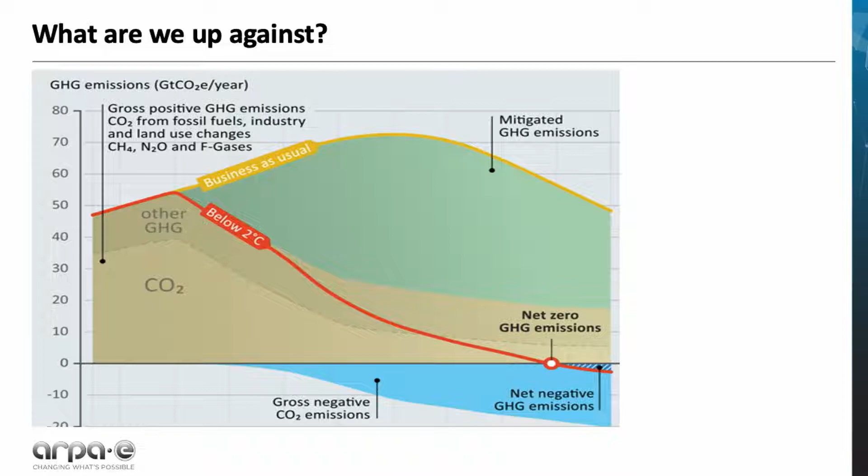I don't know if it's possible to get the slides up. Okay, on the screen. What we're going to be hearing today is 4 talks that address this carbon problem, looking at some potentially innovative routes to address not just CO2, but also other greenhouse gas emissions. The plan is to have each of us speak for 7 minutes.

Ian's going to be giving you some really novel ideas about how nuclear can fit into the carbon removal scheme. Marina is going to be talking about how buildings don't have to just be passive structures, but can take an active role. I'll talk about a different way of looking at our energy delivery systems, to see if there are some options we may not be considering around low-cost, low-carbon energy delivery. And Elizabeth will finish us off talking about how we can essentially reverse what we've been doing for the past 200 years and put the carbon back where it belongs.

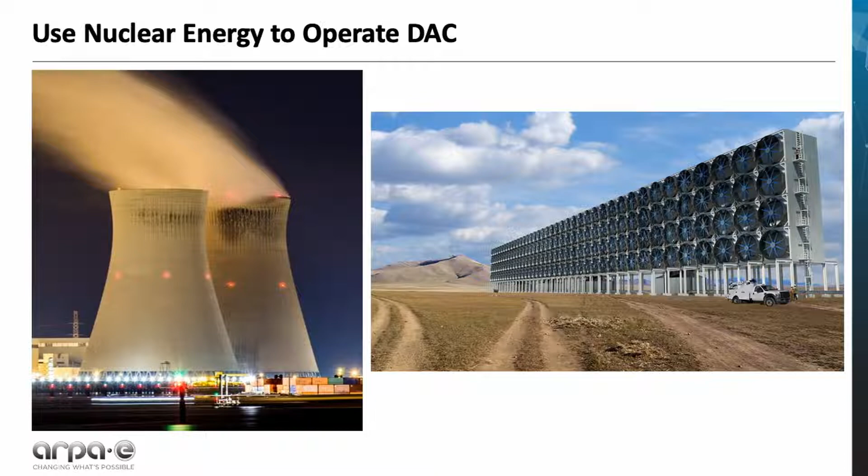At a first glance, most people would recognize that these are two very expensive processes. Nuclear energy is one of the more expensive energy generating processes, and direct air capture is one of the more expensive carbon removal technologies that is also energy intense. So people would first think, why is this innovative in the first place?

If you look at what a potential process flow diagram would look like, you would get nuclear heat from a nuclear reaction, make electricity, and then do a thermally driven direct air capture process.

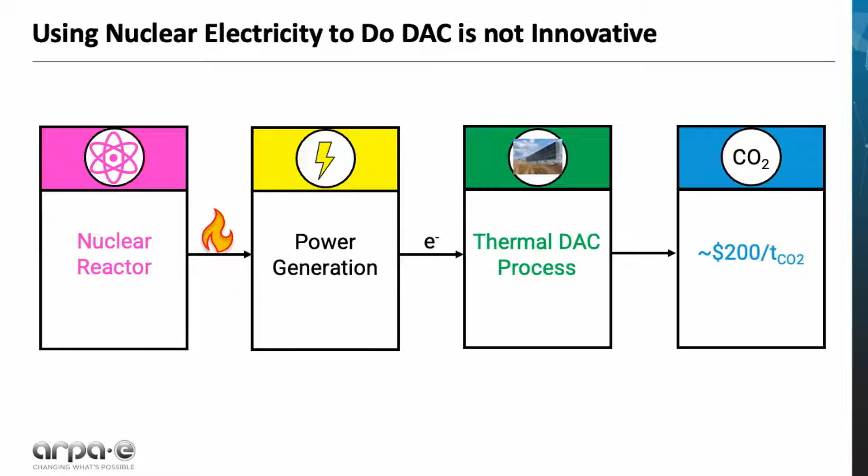Well, I don't actually think that's the innovative part of using nuclear energy to do direct air capture. What I actually think is you eliminate the inefficient step of going from heat to electricity to drive a thermal direct air capture process. Nuclear reactions produce heat — they do not produce electricity — and I think the mindset needs to be broken that nuclear is only an electricity generating source, but rather a great source of low cost, low carbon energy.

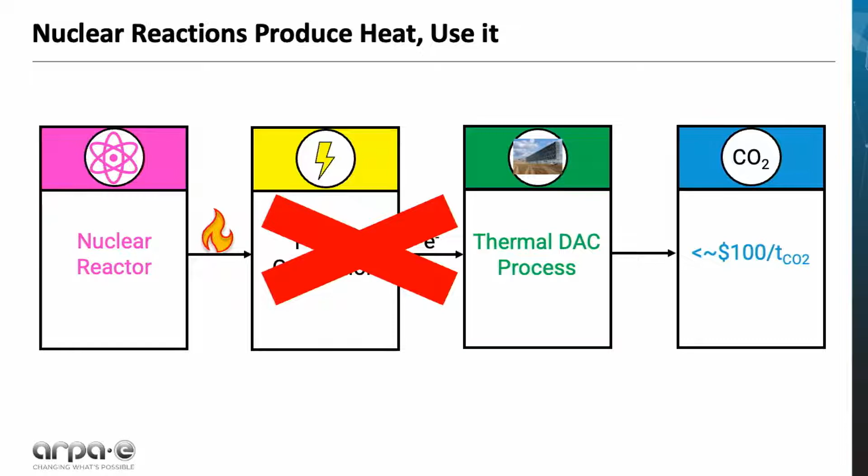So from the nuclear operator perspective, I believe nuclear operators should honestly just ignore electricity generation and go after this limitless need for carbon removal, because it's a very necessary and energy intensive process that we're going to be doing for the next 100 years.

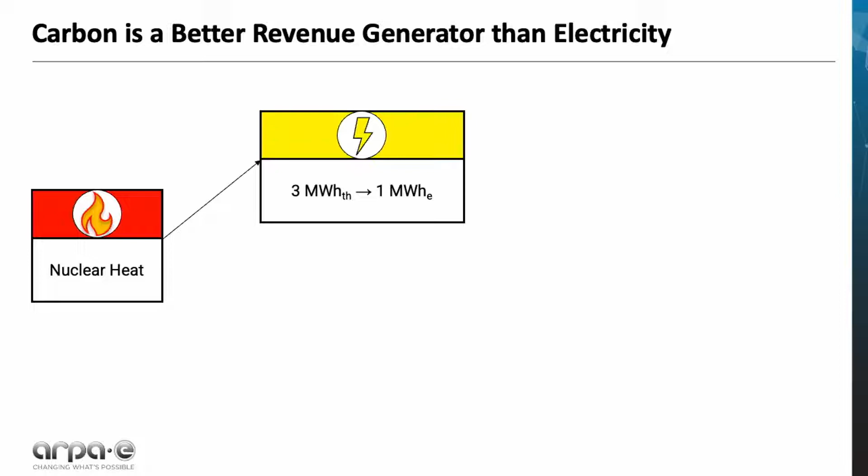If you're a nuclear operator and you generate 3 megawatt hours of thermal energy, because of Carnot inefficiencies you're going to get 1 megawatt hour of electrical energy out, and you might be able to sell that for $20 to $40 on a wholesale market for electricity pricing. You're competing with renewables, but in reality what you want to be doing is using those 3 megawatt hours of thermal energy to drive direct air capture.

Now with a pretty well-known carbon price — if we can come to consensus that that's about $100 per ton — this carbon is going to be a much better revenue generator than electricity, because you can do 1 to 3 tons of carbon dioxide priced at maybe $100 to $300 a ton, depending on your direct air capture technology.

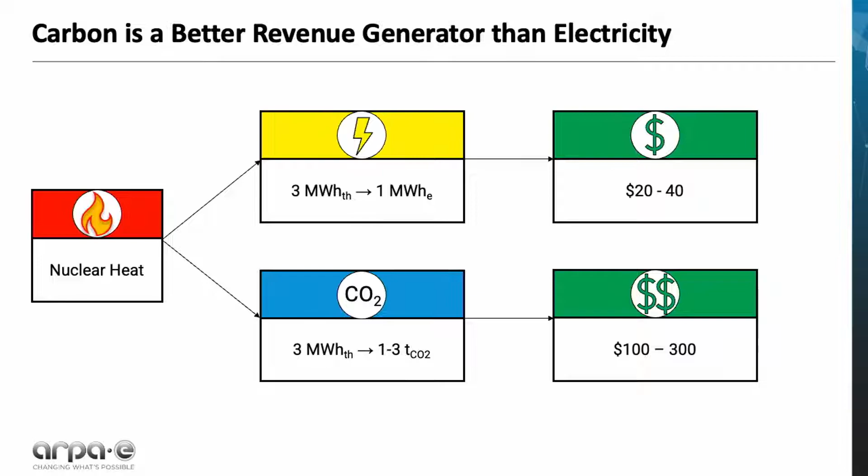The real key thing that needs to be developed is direct air capture technology that better pairs with a nuclear system. Walking through a sensitivity analysis I did, if we look at the gains needed in direct air capture technology, and use conservative estimates and minor updates to a proposed nuclear concept, just using heat from the reactor, direct air capture innovation systems are required - that's something that needs to be done for a potential FOA in this area. If we take conservative estimates for the nuclear energy that would otherwise be used to make electricity, this could result in a pathway that is less than $100 a ton, because we're bypassing that inefficient step of going from heat to electricity and potentially back to heat.

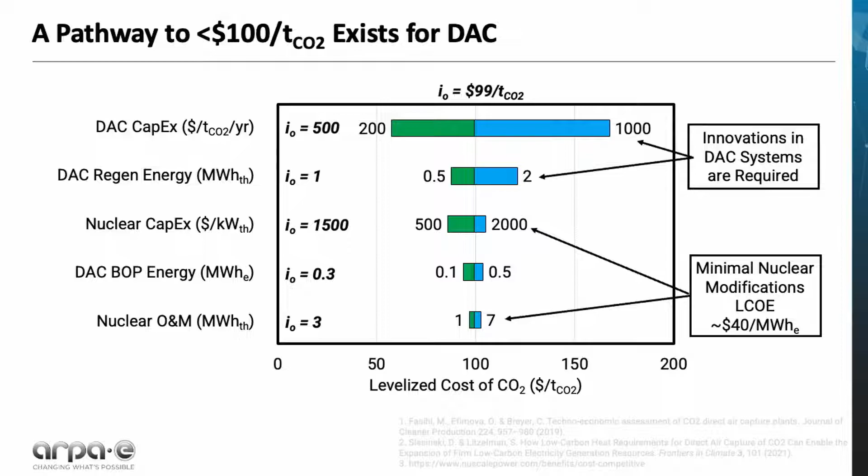This is why I believe you should use nuclear for things that are heat driven, not for things that are electrically driven. There are many processes in a decarbonized world that require heat, so nuclear is the optimal, low cost, low carbon heat source. And why I say that is, if you're going to use cheap fossil fuels to drive a direct air capture process, there is extra CO2 associated that you have to capture.

If we assume that we need to capture all of the CO2 if we were to use coal or natural gas to do direct air capture, that is going to come with an added cost, because you're going to generate half a ton of fossil CO2 for every direct air capture ton that you capture, and that results in an increased system cost, because you have to have all of that extra capacity for direct air capture plus that fossil carbon dioxide.

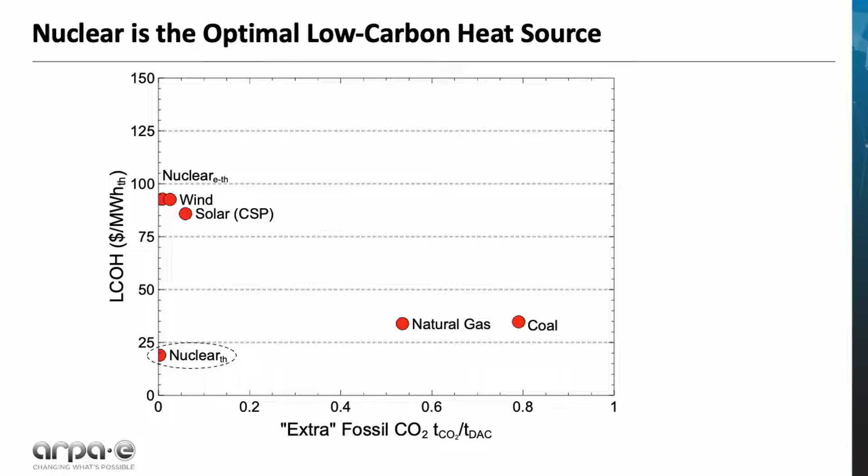With a nuclear source, you don't have to carry 500 kilotons of fossil carbon carrying capacity on a 1 megaton a year direct air capture plant, so everything can be more compact, the balance of plant components can be smaller, and you can get rid of the unnecessary balance of plant components associated with using fossil carbon dioxide. What I think we really need to go after are these direct air capture desorption loops that may better pair with advanced nuclear.

What I mean by that is going after an absorption-desorption system that can operate in a 500 to 700 degree C range, so you can use some of these more advanced reactors and potentially deliver low-cost, low-carbon heat to drive direct air capture in a compact system that is land efficient and carbon efficient.

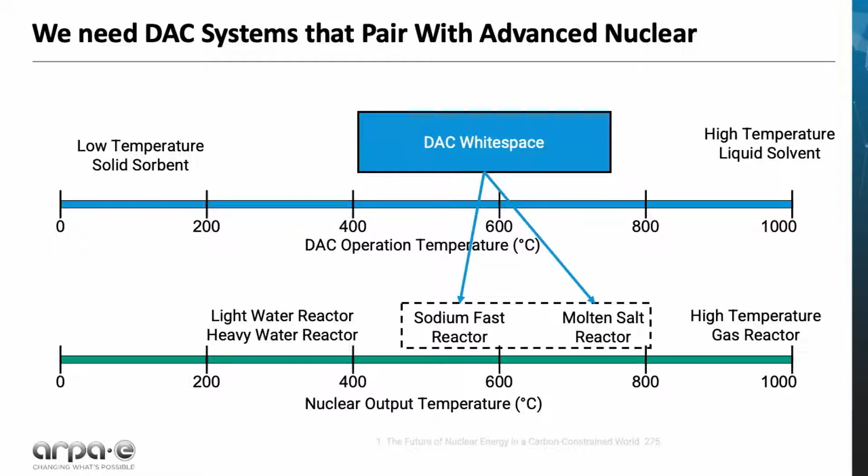If we were able to do this, I would definitely welcome any feedback on this idea, and I'll be at coffee at ARPA-E tomorrow to further discuss any integration with nuclear heat - not even for direct air capture, but just using nuclear heat to drive a lot of these hard to decarbonize industries.

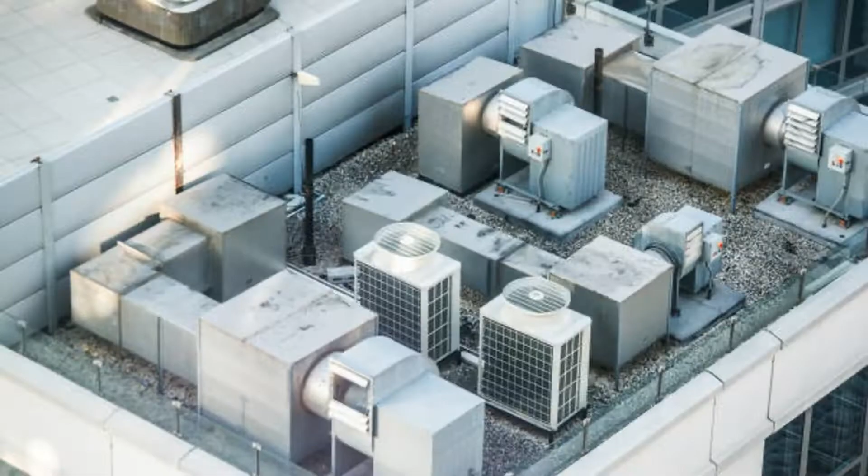And when we move indoors, we rely on mechanical systems in the form of HVAC equipment to perform similar functions, to ventilate and condition the space. In commercial buildings, the most common HVAC systems are these, where the HVAC is a packaged unit that is installed on the rooftop of the building.

As Jack mentioned earlier, we're going to need somewhere between 5 and 20 gigatons of CO2 removal capacity per year by 2100 to maintain acceptable outdoor temperatures. That's really going to rely on a full suite of approaches.

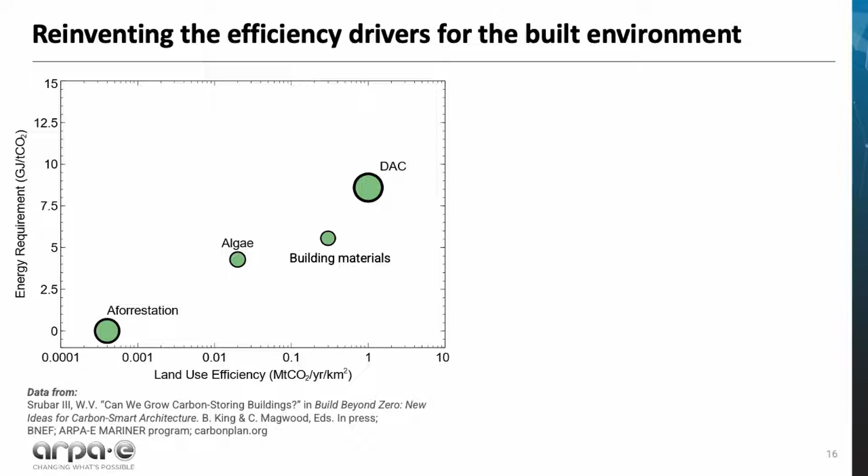With that motivation in mind, ARPA-E launched the Hestia program late last year, which is really aimed at tackling embodied emissions in buildings by storing enough carbon in the finished building product that you can actually have, hopefully, a building that is net carbon negative over its lifetime.

Now, the relative CO2 capacity of an approach like this, as represented by the size of the bubbles, may be smaller relative to nature-based or engineered solutions, but it does offer us a few benefits. First is the fact that we have dual functionality in the form of a finished product that can be used elsewhere.

But it also really makes us start to think about how we can find new strategies and approaches to tackling emissions reductions for the built environment itself.

And so with that kind of broader vision in mind, I'd like for us to consider what might be possible in terms of expanding direct air capture mechanisms, and doing so in a way where we can tackle the operational emissions associated with buildings, and specifically around our HVAC operations.

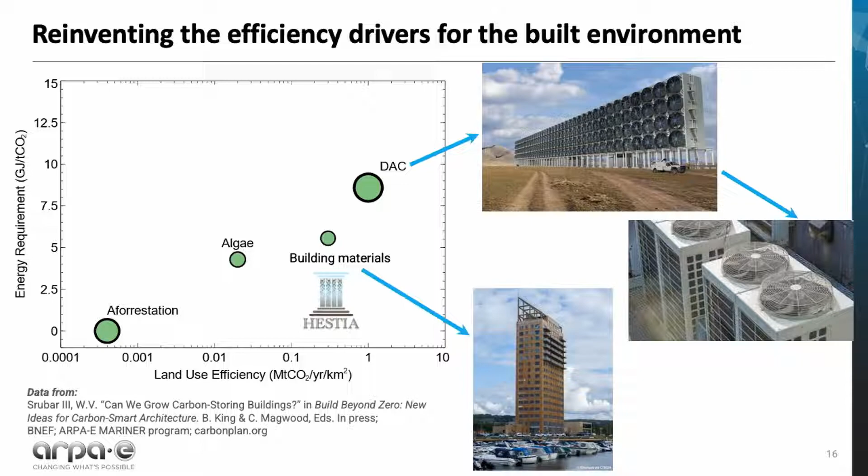Companies like Noya and Soletair Power are already demonstrating what's possible in terms of retrofit opportunities with HVAC systems, and are doing so in order to reduce the upfront capital costs and installation time associated with direct air capture.

Now, Soletair Power, for example, reports the capability of absorbing 300 kilograms of CO2 per day in an average building, which on an annual basis would translate to roughly 120 tons. So if we think about the fact that we have 5.9 million commercial buildings in the United States, with widespread adoption, this could provide the opportunity for hundreds of megatons of CO2 removal per year.

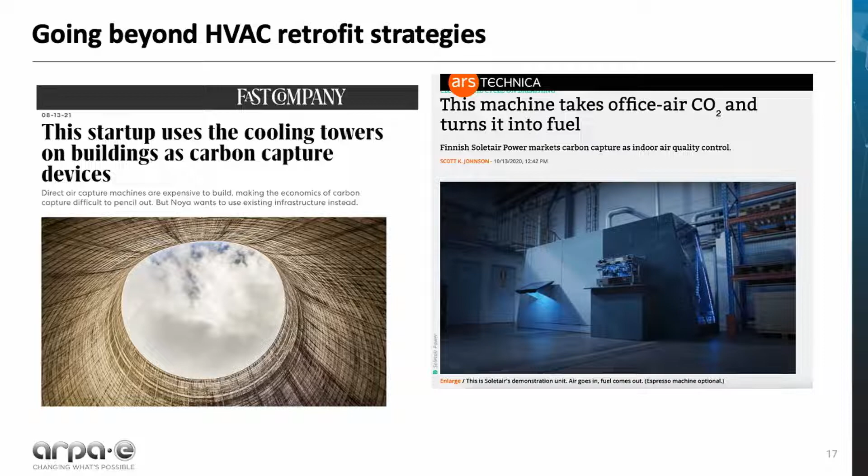And this gives us a good starting point to start to consider: well, what if we not only optimize for the operations, what if we not only optimize in terms of being able to remove as much CO2 both in the indoor and outdoor air as possible? What if we also optimize for the HVAC operations themselves?

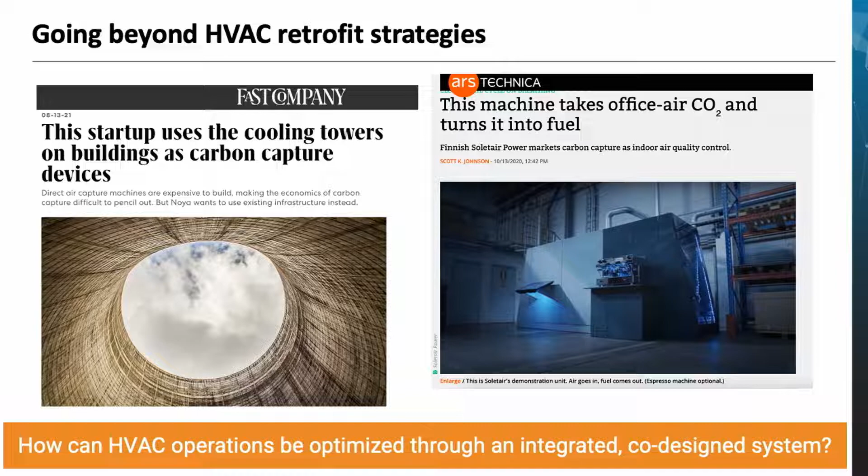And so the temperatures associated with the HVAC operations need to align with what's necessary for direct air capture. But also the pressures needed for the direct air capture itself need to be such that they don't disrupt the overall airflow and operations of the building. And finally, any sorbent or membrane chemistry needs to be selective and stable for absorbing CO2 while also being suitable for the indoor environment, considering the fact that these buildings are occupied.

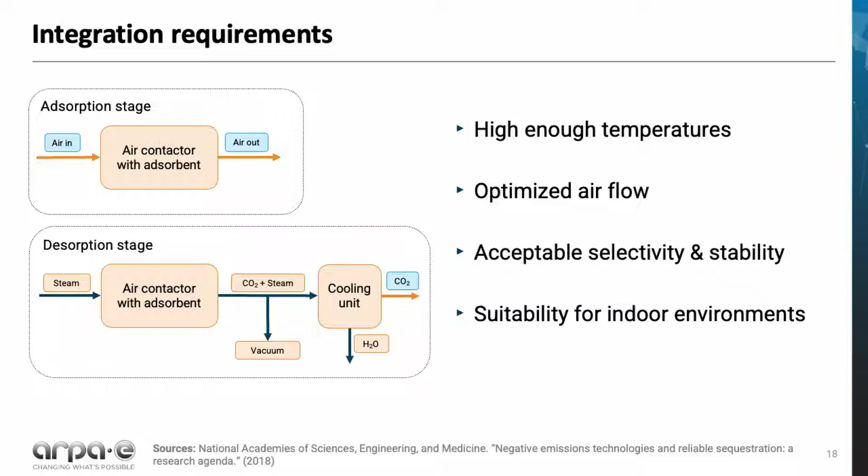Now we can calculate the overall CO2 capacity by looking at the air changes per hour. This is calculated by the ventilation rate in cubic feet per minute, along with the overall volume of the building. The ventilation rates themselves are dictated by ASHRAE guidelines to maintain a suitable indoor environment. And so in the absence of expensive CO2 or occupancy monitoring equipment, the default is to overventilate, which comes with an energy penalty in terms of the HVAC operations.

And while that gives us kind of a benefit in terms of maximizing the amount of CO2 we can remove from both the indoor and outdoor air through more and more fresh air exchanges, it does come with the potential deficit in terms of the outdoor temperature and humidity and the impact that has on the HVAC operations themselves.

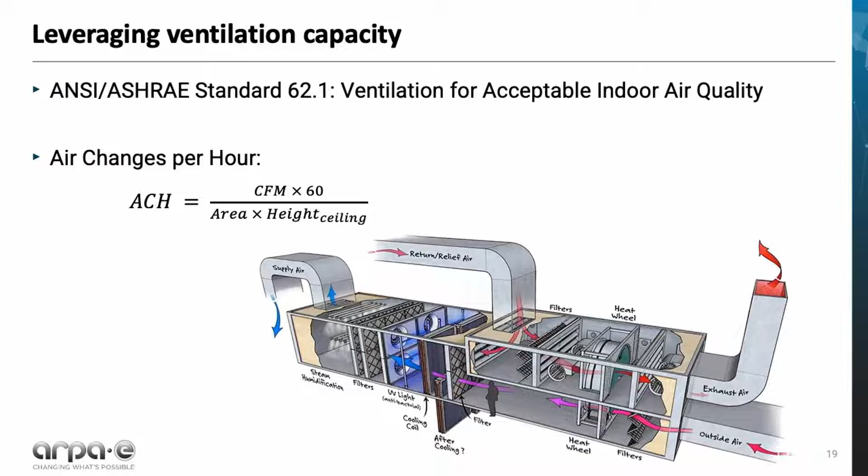And so the interest really of late has been in pushing past traditional vapor compression technologies, which, as shown in the red here, are limited by the Carnot limit, and creating new separation approaches that, as shown in the purple, can provide an order of magnitude improvement in the moisture removal efficiency and get much closer to the minimum separation energy. And this also gives the benefit in terms of improving the cooling efficiency as well, by separating out the dehumidification and temperature control of the building.

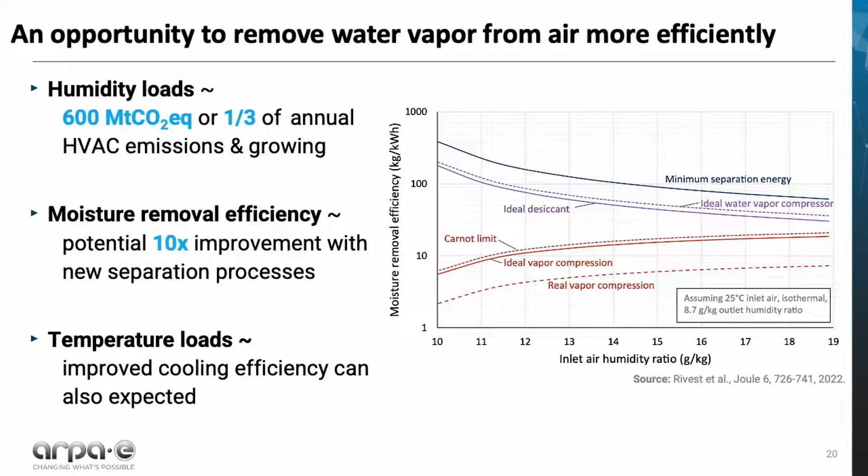But what if we actually use direct air capture and redesign those materials and chemistries such that we can run dehumidification through the DAC system? This could potentially provide yet another pathway for dehumidification beyond vapor compression.

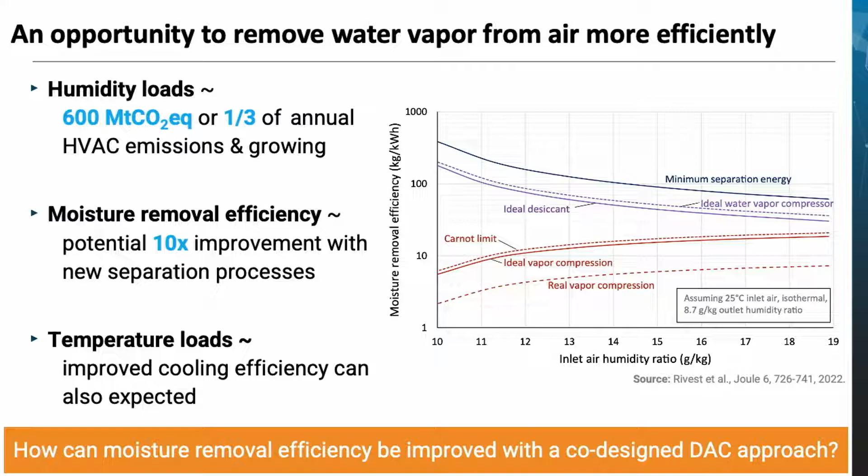Now, if something like this were to work, that's only the start, because there are a lot of market considerations that have to come into play. First and foremost is, what does the market itself look like? How do you actually differentiate between the incentives for carbon removal versus the incentives for energy efficiency improvements and savings on one's utility bill? That's really still an open question if this were to work.

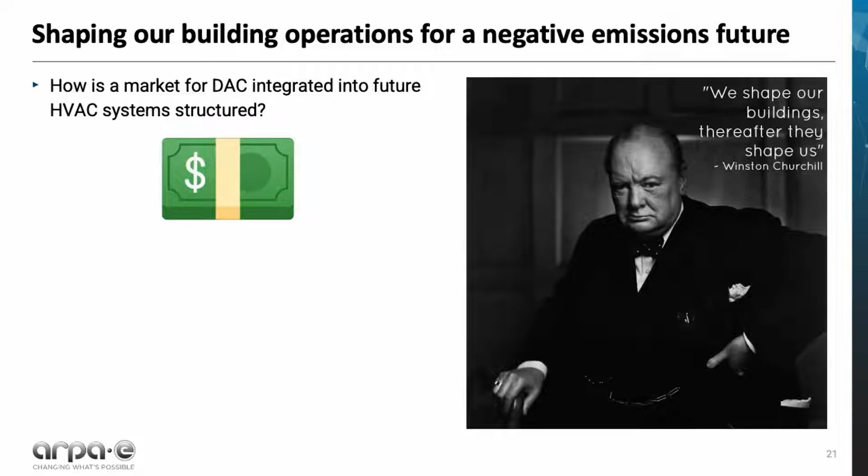But also, if we are absorbing that much CO2 in large commercial buildings across the US, what do we do with that CO2 afterwards? What form is it stored in? And then finally, how is it transported? What does that infrastructure look like? This could take the form of solid, gas, or liquid, but we really have to have an appropriate network to do that.

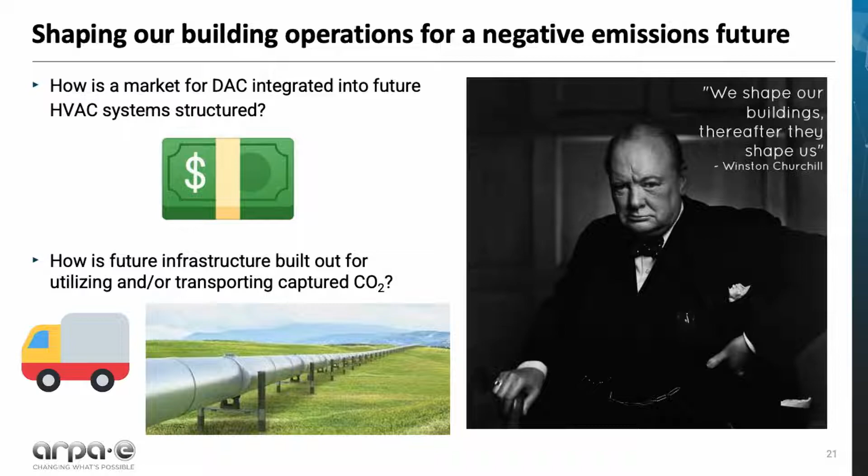So with that, I'd really be interested in other people's thoughts on how we could co-design HVAC operations with direct air capture and meet both our building efficiency goals as well as our climate goals. And with that, I would like to hand it off to Jack, who's going to tell us about the wonders of dimethyl ether. Thanks.

Well, thanks everyone. My starting point is a comment that Jenny Gerbi made yesterday in introductory comments. One of the roles of ARPA-E is to create new options, ideally disruptive options. So I'd like to share one that maybe challenges some conventional thinking, and hopefully you'll consider might be a little bit disruptive too. The notion is that we have three energy delivery systems in the US, three grids:

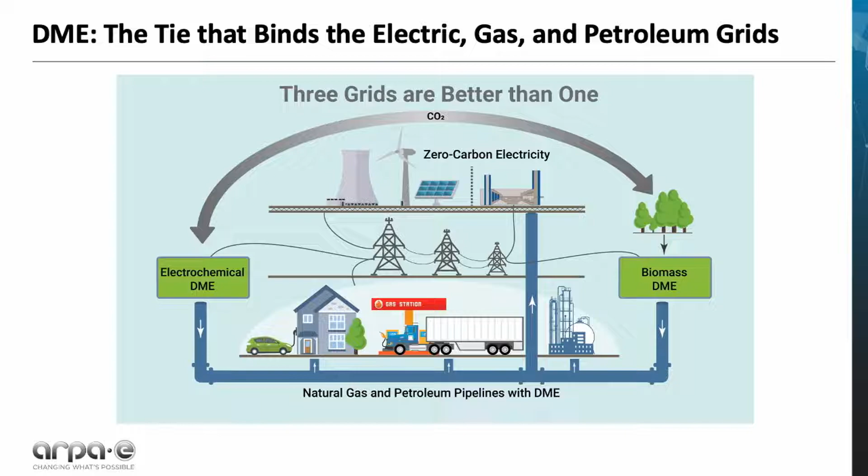electric, gas, and petroleum. If we do this right, we can get the maximum benefit from those existing grids, and we can also get the maximum benefit from the existing infrastructure. That combination allows us to get the lowest cost, low carbon future. And that's what we're going to talk about. But the key here is dimethyl ether, because this is the tie that binds the grids together.

DME is very similar to something you already know, propane. You probably use it in your backyard for grilling. The difference is that the central carbon in propane is replaced with oxygen. So just like propane, DME is a gas at ambient conditions, but under slight pressure, it can be moved and stored as a liquid.

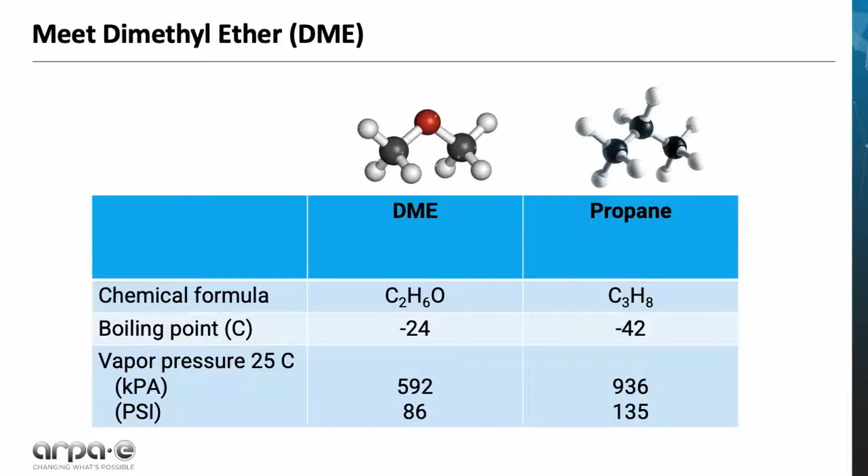The advantage of DME compared to some of the other energy carriers we're thinking about are twofold. First of all, it has significantly higher energy density. It has 6 times the energy density of hydrogen and 60% more energy density than methane. That means if you're looking at a natural gas distribution system, that system automatically has 60% more capacity than it has with natural gas.

In the case of hydrogen, if you want to replace natural gas with hydrogen, you have to go out and build 2 entirely new gas grids at a cost of trillions of dollars. The other thing is, when you condense it into a liquid by putting it under mild pressure, it has an order of magnitude higher energy density.

The second thing, and this is equally important, is that we all know methane is a bad greenhouse gas, but hydrogen is not necessarily benign. It has a very high short-life greenhouse gas warming potential. In contrast, DME has a 5-day lifetime in the atmosphere and essentially no greenhouse gas warming potential.

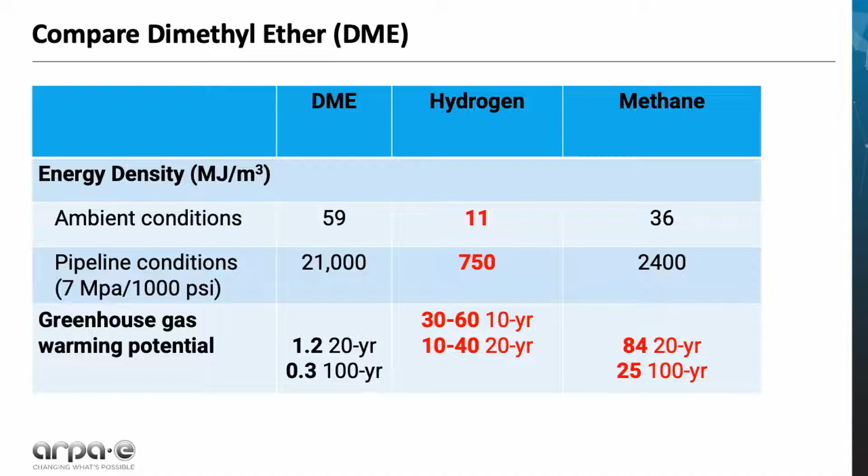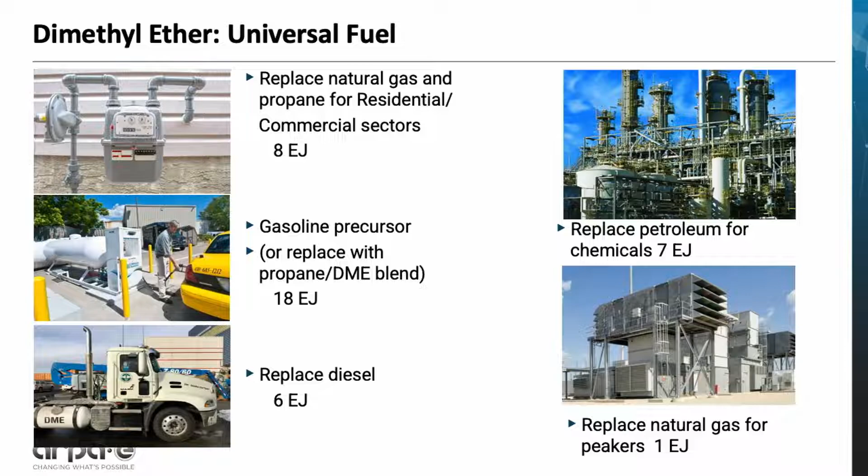So DME looks like it could be an interesting candidate, but what really seals the deal for DME is that it is an extremely versatile fuel. It can replace propane and natural gas for heating. In China, they already use it as a propane substitute. It can replace diesel as a drop-in fuel, it can replace petrochemical feedstocks, and it can power the 1,000 or so peaker units we have for the electric grid. It's also a gasoline precursor, and in fact, 40 years ago, people were making gasoline from DME in New Zealand in a commercial plant. So this molecule can address 40% of our primary energy needs.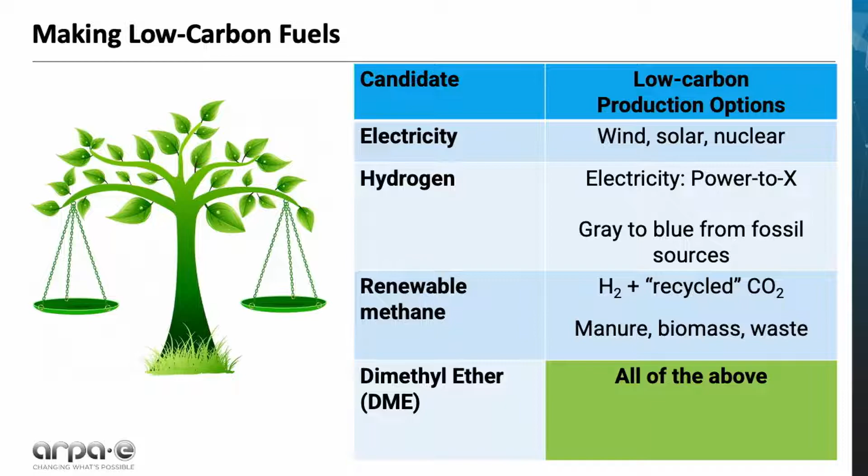So the question now is, well, how do you get this DME? Where does it come from? It turns out that all of the low carbon paths we're seeking for green electricity, for green hydrogen, or any color hydrogen for that matter, renewable methane, all of those paths can be used to make dimethyl ether with known conventional technology, nothing to invent.

So now we get to the question: this may be an interesting molecule, but what's it going to cost? Here's my one equation—this is your cost of energy. If you look at your utility bill today, you pay for the cost of producing that energy, whether it's electrons or natural gas, and you pay for the delivery cost. And if you look closely, that delivery cost is more than half of your bill.

That's key for the low carbon future. You also have to buy the end-use hardware. You might have a car, you might have a boiler, you might have a water heater, and you might have to replace those under certain energy futures. So let's talk about this, but let's focus on delivery first.

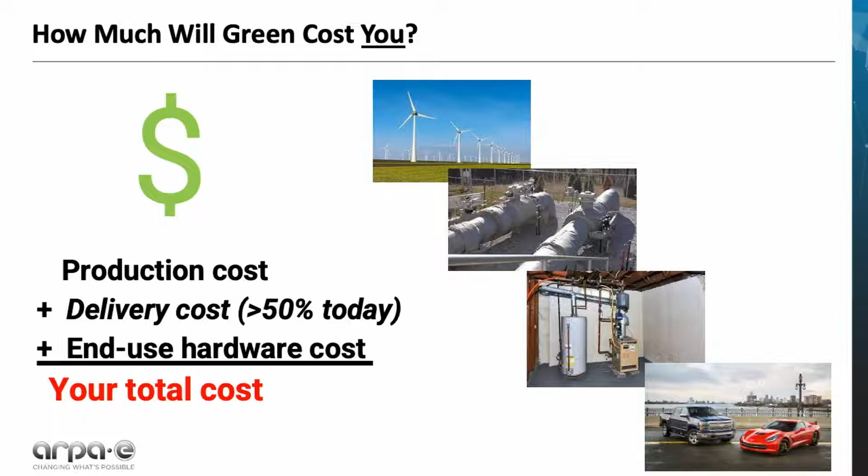So we have 3 grids, right? The electric grid is the smallest grid. It has a summer and a winter peak. The natural gas grid is about twice the size of the electric grid in terms of energy delivery, but it's only used heavily part of the time—it's not used much in the summer. It has a winter peak, and for 3/4 of the year it's basically underutilized. It delivers about 400 terawatt-hours of energy equivalent. Gasoline is a constant demand, also at about 440 terawatt-hours.

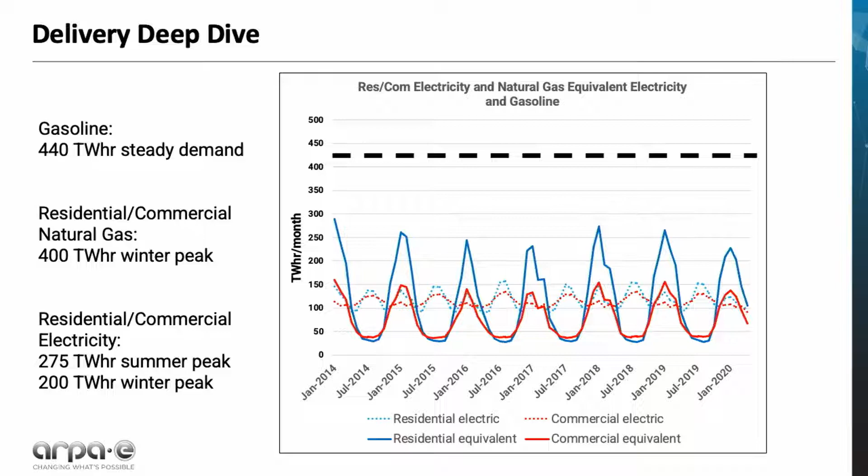If you want to use the electric grid to replace heat, you have to handle that coincident winter load—you have to build 2 new electric grids to do that. If you want to then take on gasoline, you need 2 more electric grids. So let's talk about these grids and what the implications are.

The grids all look similar, but there are some big differences. The electric grid costs 4 times as much to build for the same equivalent energy delivery as pipes. It's also the most vulnerable grid to natural disasters, and it's really hard to store electrons. If you look at the petroleum grid, it stores 7 exajoules of energy at a cost that's 200 times lower. And guess what—you don't need any nickel, you don't need anything fancy. It's called a tank, no technology.

If you look at the gas grid, it has this enormous latent capacity, and you get a 60% stretch on that if you use DME.

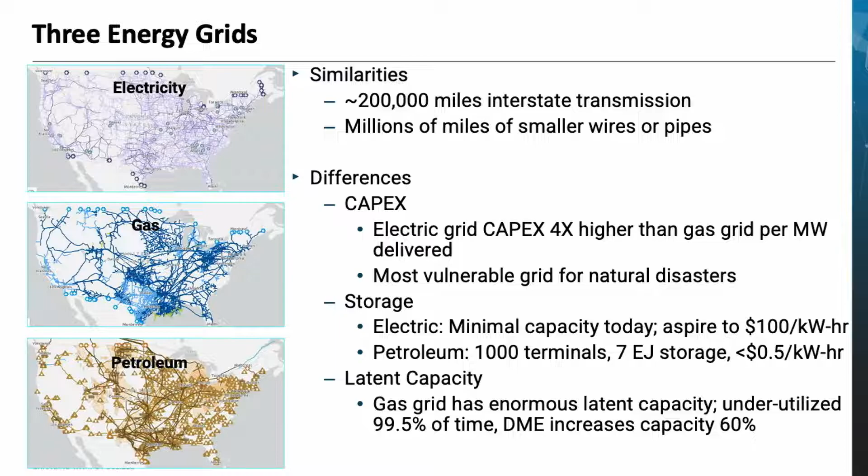So what's your bottom line look like in an energy future? Here's the thing that's kind of surprising: it almost doesn't matter what the cost to make the green fuel is—it's overwhelmed by the cost to deliver that fuel to you, the price you're going to pay on your monthly bill, and it's also significantly influenced by how much stuff you need to replace. For example, if we're going to electrify heat, we've got to replace 75 million furnaces, and we may have to replace 270 million vehicles.

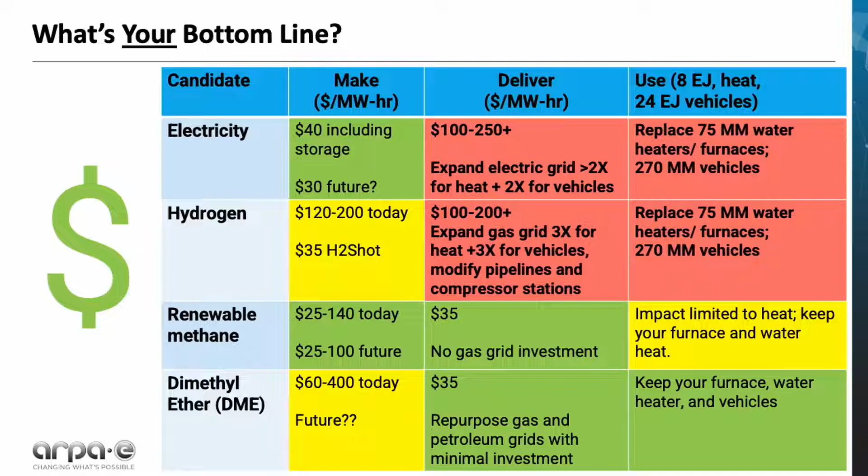If you're going to use hydrogen, you need to build out 6 times the gas grid to handle the load—that's a huge investment. And oh, by the way, you also have to replace your appliances. What's interesting with dimethyl ether is it costs a little bit more to make, but you don't have to spend a fortune to deliver it if you use the existing hardware, and you don't have to replace what you've already got. So here's some final thoughts to keep in mind.

First of all, DME is just one of many possible energy carriers. Clearly we're going to need silver buckshot. There will be a role for green electrons, there will be a role for hydrogen. But what I submit to you is to think about other energy carriers that can leverage existing infrastructure and still be green. The markets will sort all this out—let's not pick winners too early. Let's keep our options open, and that's what ARPA-E does: we create options. The other thing is, I think the lesson here is we really need a system-level analysis.

We have to look across the entire supply chain—production, distribution, and end use—because these all have strong cost implications. And what I will postulate is that repurposing existing infrastructure is also green. The stuff that you don't have to throw away and rebuild is also an environmental benefit. So with that, I'd like to conclude.

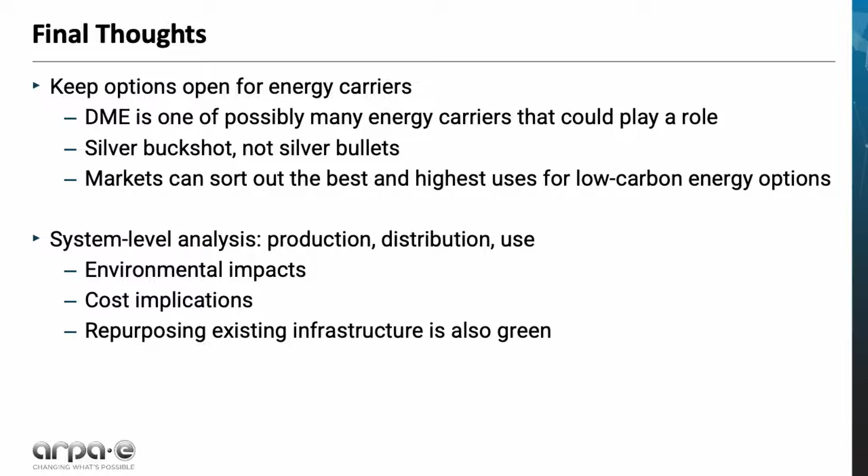DME is certainly an interesting molecule. I hope you'll get to know more about it. This DME can come from renewable sources. It can complement what we're doing, and I think it can help fill the gap in some of our cost objectives.

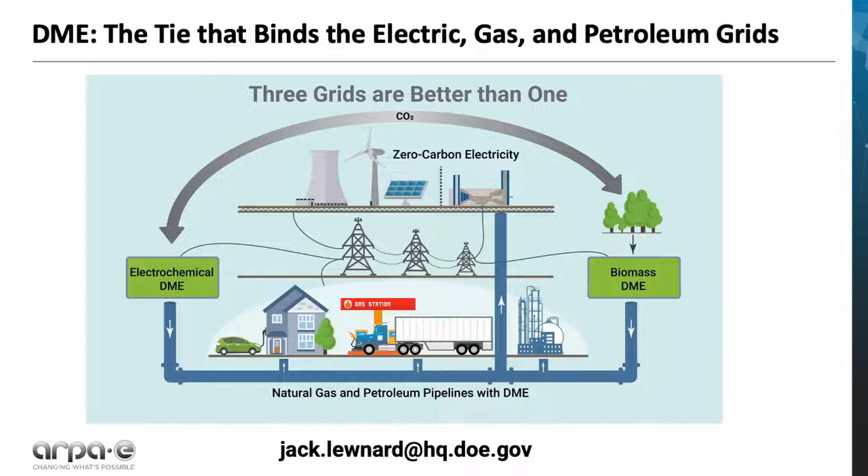I'm Elizabeth Troein, and today I'll show you how we can rethink the future of carbon storage and aim for infinitely scalable solutions. So let's dive in and see what we can do with carbon.

The burning of fossil fuels essentially reverses millions of years of natural biological carbon removal and storage. Since 1850, humans have released about 1,600 gigatons of CO2 into the atmosphere through the burning of fossil fuels alone. To put this huge number into perspective, the entirety of the built environment has 1,100 gigatons, so the CO2 we've put into our atmosphere weighs more than all of our roads and buildings globally.

It will take a concerted effort and a lot of energy to selectively remove carbon from our atmosphere to prevent the worst impacts of climate change. We've heard some creative solutions already in this session on how we can remove this carbon, but I'm here to emphasize that we must scale our storage solutions alongside our removal solutions.

We need a place to put all of this carbon. To give you a sense of the scale of current carbon storage solutions, globally about 7 million tons of CO2 per year are stored in dedicated subsurface CO2 storage reservoirs underground. And Orca, the largest direct air capture and storage project to date, has a capacity of about 4,000 tons of CO2 per year. So with current storage solutions, we're talking about kilotons per year and megatons per year, when we need to get to gigatons per year.

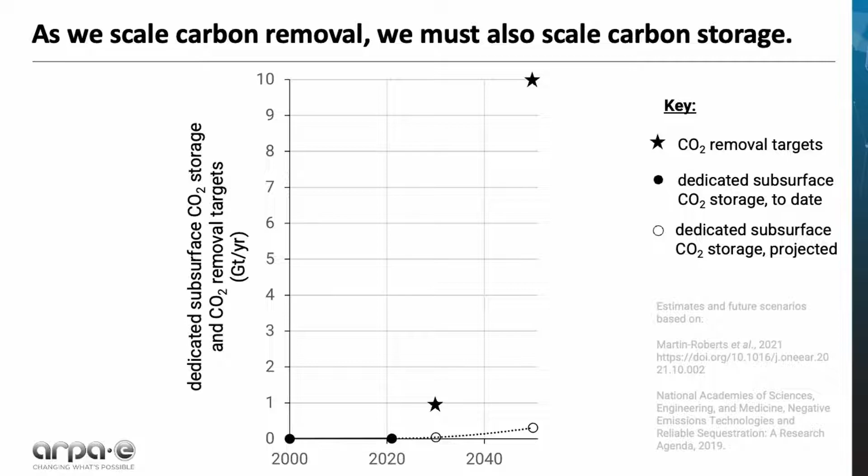So what ultimately is limiting the scalability and how quickly we can scale the existing storage solutions? Of course, this will depend on the pathway, and we'll talk about a few key pathways today.

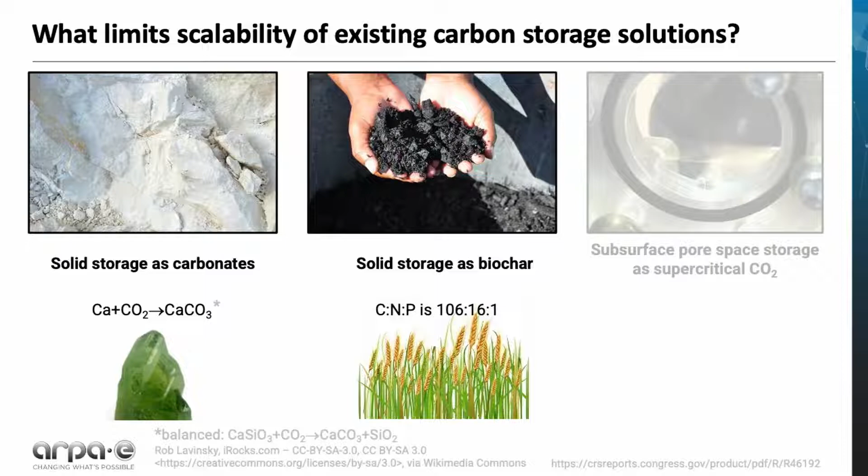For solid storage as biochar, this is the processing of biomass into a stable form that can be stored on land. Since this is a biological process, like all biological processes, it is limited by nutrients, nitrogen and phosphorus, at a fixed ratio to carbon. Phosphorus also must ultimately be mined, it must originate in rock, we cannot fix phosphorus from the atmosphere like we can do with nitrogen. And as with all plant-based biological processes, this will also be limited by arable land, so the availability of arable land in a given year can impact the scalability of this carbon storage solution.

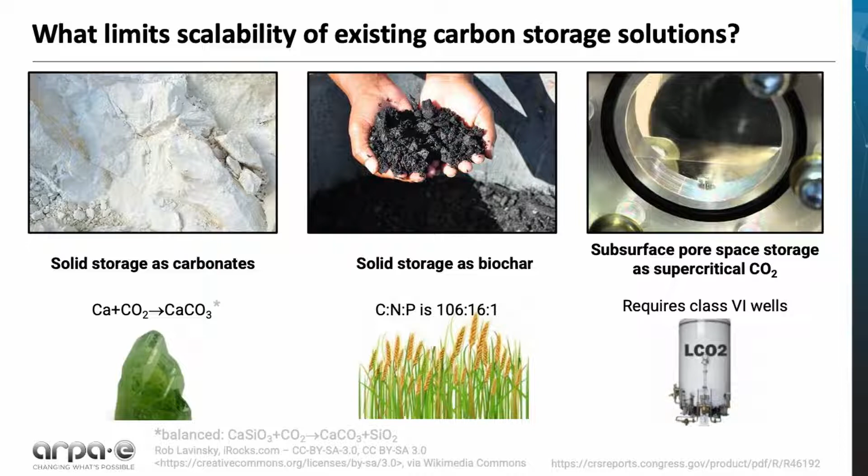We may think about subsurface pore space storage as supercritical CO2. Ultimately, what limits the capacity and how quickly we can scale this storage solution is how quickly we can get CO2 underground. This not only involves the transport of CO2 from where it is removed from the atmosphere to where it will be stored underground, but it also depends on how quickly we can get that CO2 underground in Class 6 wells. So how quickly can we build out these injection wells? And can we build out a pipeline, or can we cost effectively transport this CO2? Those are open questions that may limit just how quickly we can scale.

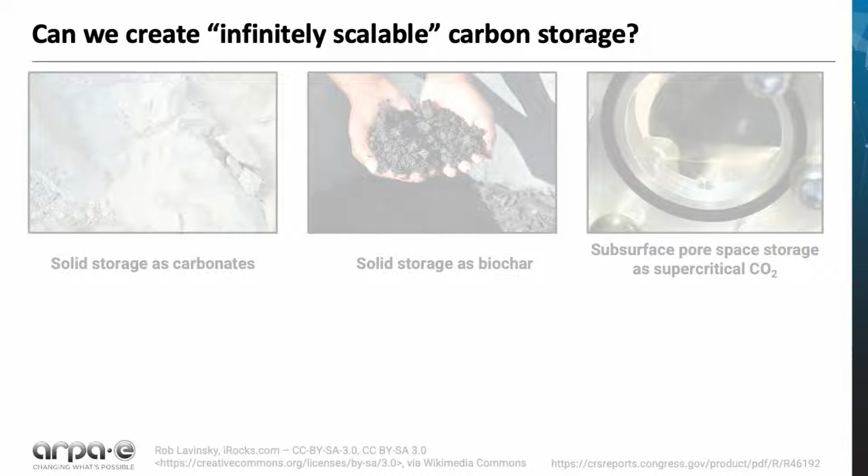It is likely that all of these solutions will be important to carbon storage, especially in the short term. But how can we use the technical limitations of scalability of these solutions to frame the next generation of carbon storage solutions?

Can we reduce or potentially even eliminate any stoichiometric mining requirements? Can we eliminate the need for consumable reactants that must be mined? Can we reduce or even eliminate the need to transport the CO2? Can we make a form of carbon that is either easier to transport, or that we can store anywhere? And can we eliminate the arable land requirements to make sure we're maximizing the potential to scale, especially in a world with a growing population with an increased demand for food?

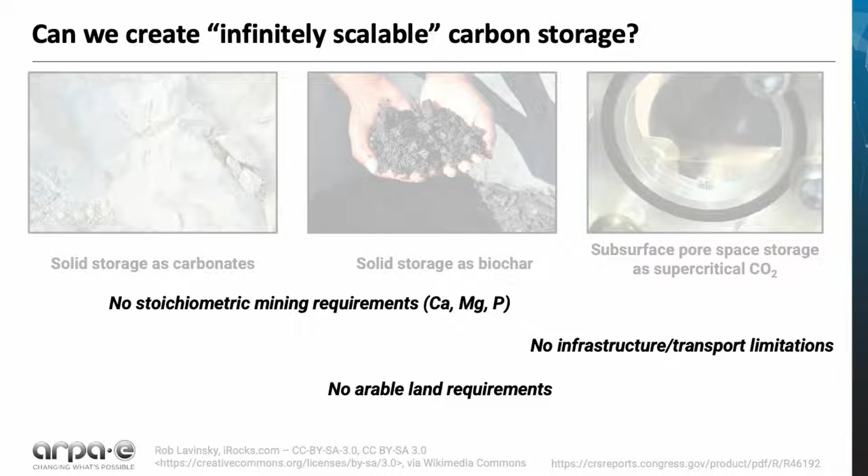So I'll present a few potential pathways just to get your creative juices flowing. Can we think about alternate minerals? Can we think about potentially going through an oxalate pathway, which can store twice as much carbon per cation compared to carbonates? Or can we think about leveraging the formation of sodium aluminosilicates, which could potentially use a brine-based cation source and would potentially eliminate the need for new mining?

And can we think about artificial photosynthesis? Right now, artificial photosynthesis is being implemented to take CO2 and make carbon-based fuels, but biology creates a lot of solid phase biopolymers that contain carbon. Can we optimize the production of these polymers for dedicated solid phase carbon storage?

And can we think about how to scale catalytic CO2 to solid carbon? This method has been implemented in the lab. It is regenerative, so it does not require any reactants that are consumable, and could potentially scale. Another thing to consider though is, can we make these solutions cost effective and competitive? So as we're thinking about these creative pathways, can we minimize cost and maximize scalability?

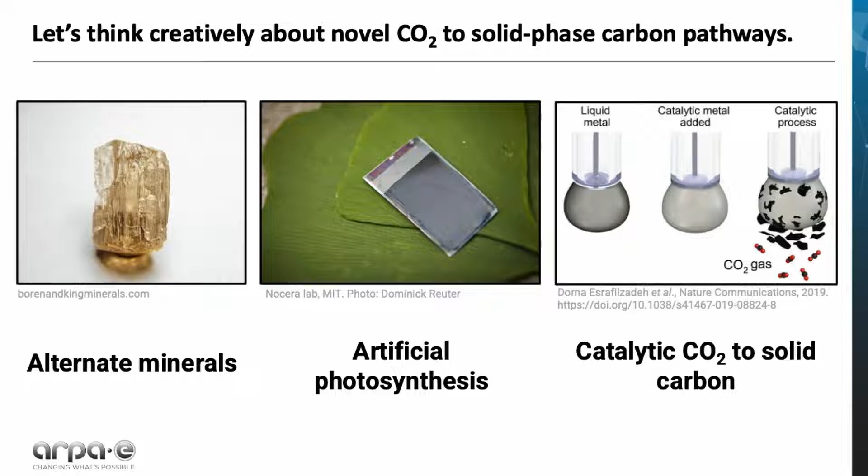And ultimately, I want to hear from you. I want to hear all of your creative ideas in this space. How can we achieve infinitely scalable carbon storage? So please reach out. Find me at the coffee at ARPA-E tomorrow morning, or any time. Please reach out, send me an email, and let's see what we can do about carbon. Thank you.

Well, looks like we have some questions coming in here, so hold on a second. This works a lot better if I put these on.

First question for Ian. Why is nuclear the cheapest form of heat? Why not use solar heat, geothermal, or PV cheap renewables to heat? That's a good question. When you look at the CapEx numbers of solar and solar to thermal, you're limited to the capacity factor. When you counter the capacity factor with nuclear, the analysis shows that nuclear heat at some high grade ends up being the lowest cost solution compared to inefficient steps of going from electricity to thermal, or limited capacity factors. But it's really a question of what temperature you want to use for a direct air capture process. I know that Climeworks is using geothermal in the Orca plant in Iceland, but I think you can really drive down the CapEx on the direct air capture side if you have a higher grade heat that is also very similar low cost.

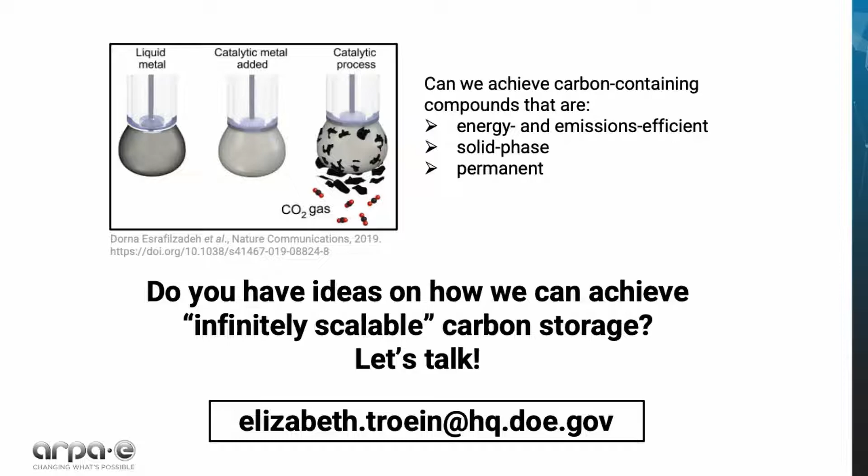Thanks. I'm going to try and answer two questions at once. One was about how does DME compare to methanol, and what is the carbon intensity of DME? The short answer is you make DME by first making methanol, then you do a condensation reaction and turn two methanols into one DME, rejecting water. So you actually go through methanol to make DME. The second question is the carbon intensity, and that depends on the path. Oberon, for example, out in California, is looking at using biogas from dairy farms. They can actually get a negative carbon intensity for their dimethyl ether, but it really is a path-dependent process, depending on whether you start with green electrons, what color hydrogen you might start with, and how you're going to get the carbon source. So all I can say is it depends. Hopefully that's a satisfactory answer for now.

Elizabeth, question for you. For new opportunities to store carbon, what innovations in technology need to take place to concentrate the CO2?

The question was what innovations need to take place for concentrating the CO2, and what new opportunities exist to store carbon?

Great question. As we think about storage solutions, we can think about ones that either take advantage of the CO2 stream coming off direct air capture processes, or other ways—enhanced weathering or geomineralization processes that we could extend to an oxalate system that could potentially take CO2 directly from bulk air. So we may not need to go through a CO2 stream.